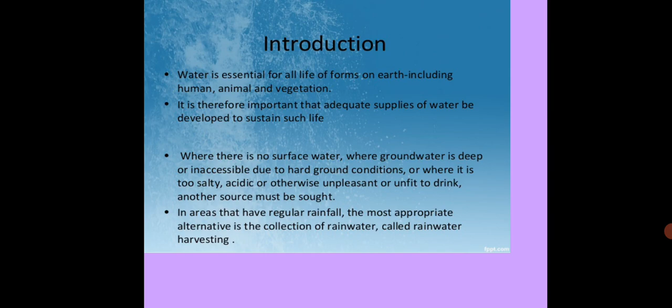What is rainwater harvesting? The term rainwater harvesting is usually taken to mean the immediate collection of rainwater running off surfaces upon which it has fallen directly. The definition excludes runoff from land watersheds into streams, rivers, lakes, etc. Hence, it is the catching of rainwater when it falls and storing it to use during a non-rainy season.

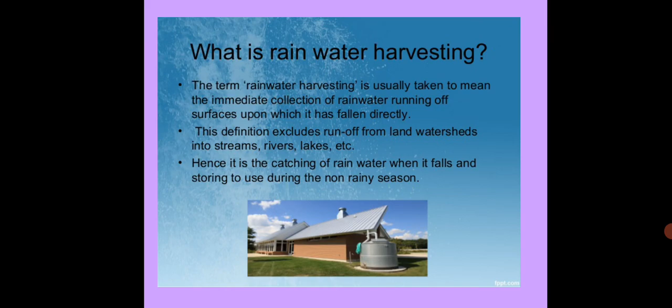The technology of rainwater harvesting can be divided according to purpose and the source of collecting water. There are two methods: the first is rooftop harvesting, the second is runoff harvesting. The methods can be selected considering the purpose, the type and quantity of storage, catchment state, etc.

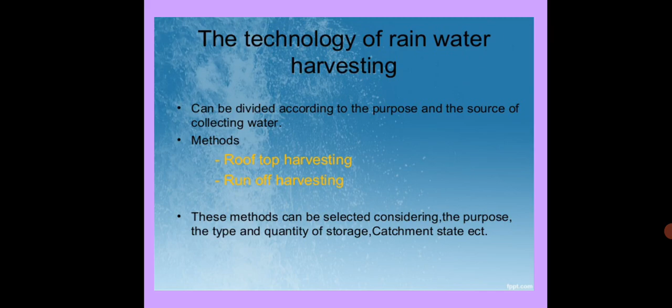Rooftop harvesting: this method includes the catchment areas as the rooftop in rural and urban areas. This includes rooftops of houses, flats, factories, offices, and complexes.

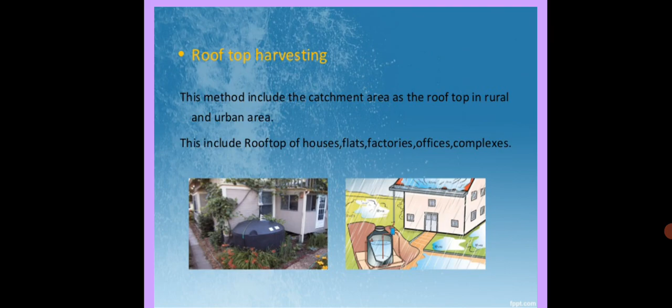The next one is runoff harvesting. Here the runoff water is collected. Gardens, driveways, landscapes, open fields, parks, roads and pavements, and other open areas in the environment can be used to harvest rainwater runoff. Using this method, it is possible to collect water from a larger area. This is particularly advantageous in areas of low rainfall.

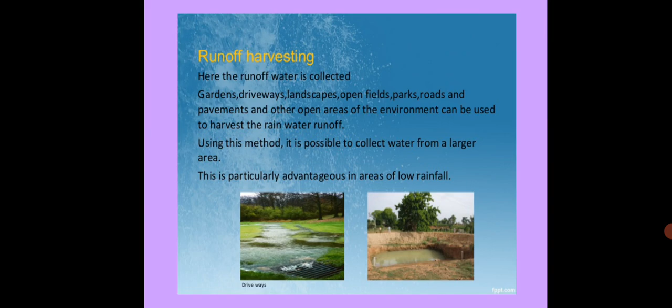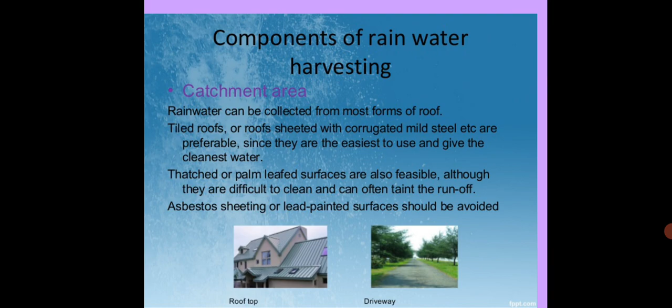Next, the components of rainwater harvesting. The first component is the catchment area. This is where rainwater can be collected, most often from a roof, tile roof, or roof sheeted with corrugated mild steel, etc. These are preferable since they are easy to use and give the cleanest water, while asbestos sheeting or lead paint surfaces should be avoided.

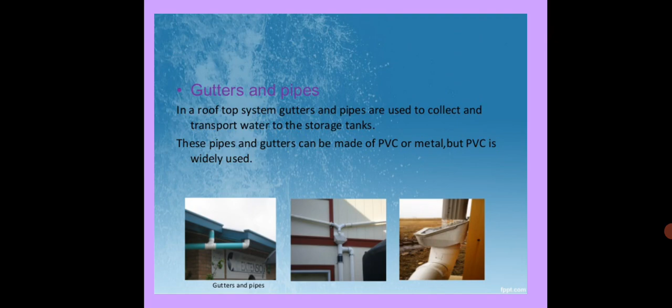The next component is gutter and pipes. In the rooftop system, gutters and pipes are used to collect and transport water to the storage tanks. These pipes and gutters can be made of PVC, polyvinyl chloride, or metal, but PVC is widely used.

The next component is filters. Filters are used to filter out the debris that comes with the rooftop water and prevent it from being added to the storage tank, such as mesh filters, first flushing devices, and sediment discharge taps.

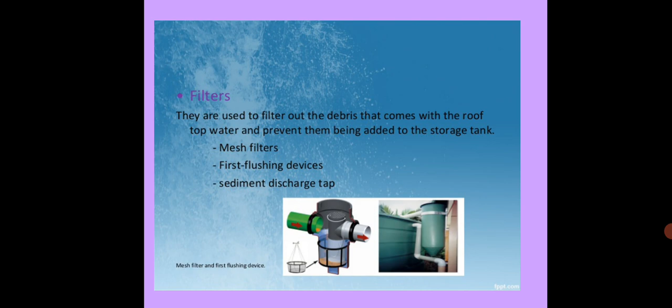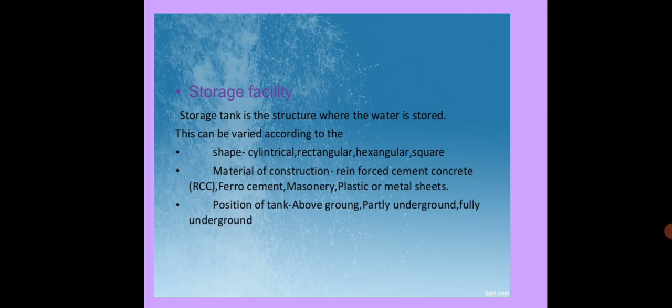The next component is the storage facility. The storage tank is the structure where the water is stored. This can vary in shape, such as cylindrical, rectangular, hexagonal, or square. Materials of construction include reinforced cement concrete (RCC), ferro cement, masonry, plastics, and metal sheets. The position of the tank can be above ground, partially underground, or fully underground.

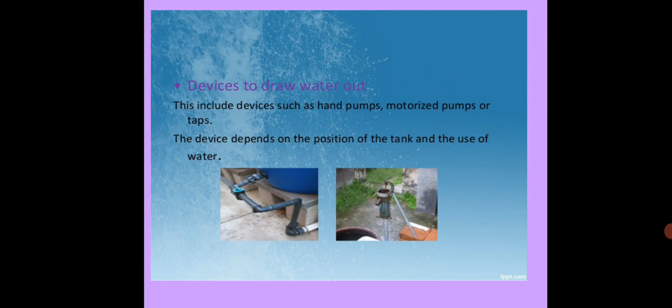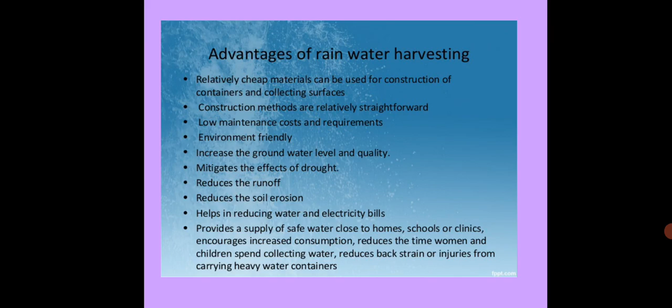The next one, advantages of rainwater harvesting, which are of variety of types. First, relatively cheap materials can be used for construction of containers and collecting surfaces. Second, construction methods are relatively straightforward. Third, low maintenance cost or requirements. Fourth, environmentally friendly. Fifth, it increases groundwater level and quality. It also mitigates the effect of drought, reduces runoff, reduces soil erosion, and helps in reducing water and electricity bills, etc.

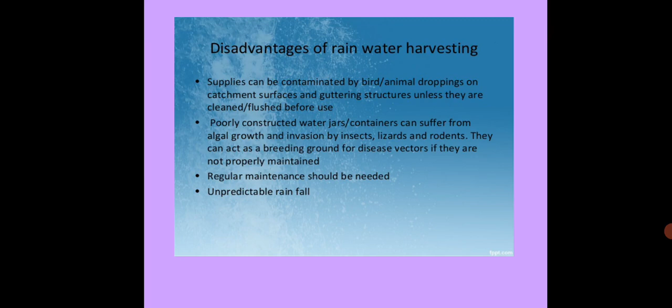The next one, disadvantages of rainwater harvesting. Supplies can be contaminated by bird and animal droppings on the catchment surface, and guttering structures unless cleaned and flushed before use. Poorly constructed water jars or containers can suffer from algal growth and invasions of insects, lizards, and rodents. They can act as a breeding ground for disease vectors if not properly maintained, so regular maintenance should be carried out. Rainfall can also be unpredictable. This covers the advantages and disadvantages of rainwater harvesting.